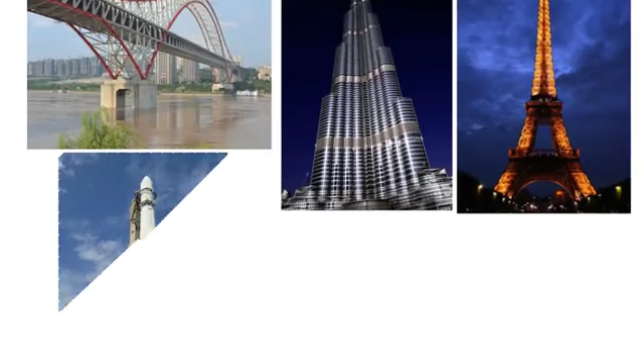First, structural engineering is about calculating and understanding the forces, strength, stability, and so on within a structure. It could be a bridge, a skyscraper, a landmark, or even a spacecraft or aircraft. Remember, these structures are very heavy and need to support their own weight so that they don't collapse. Now this subfield is the most math intensive and has lots of physics.

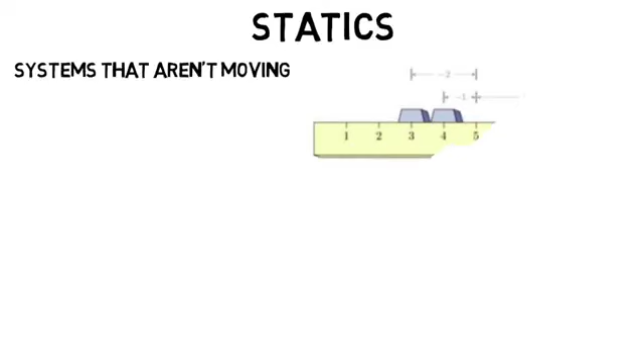All civil engineers will take a class called statics, which is all about the forces and systems that are not moving. In basic physics, you may have done a statics problem, like where does this support have to be for the system to be totally balanced and therefore not moving. You summed all the forces which equaled 0 and all the torques which equaled 0. And that's the basics of statics.

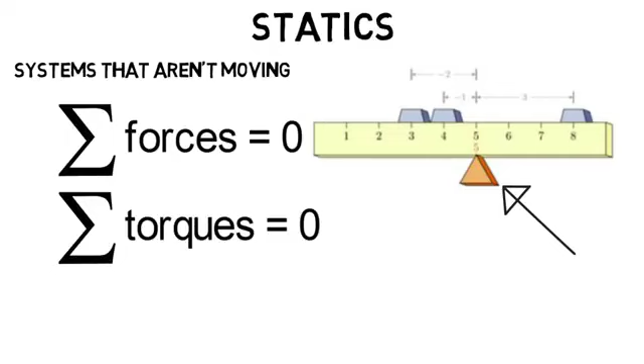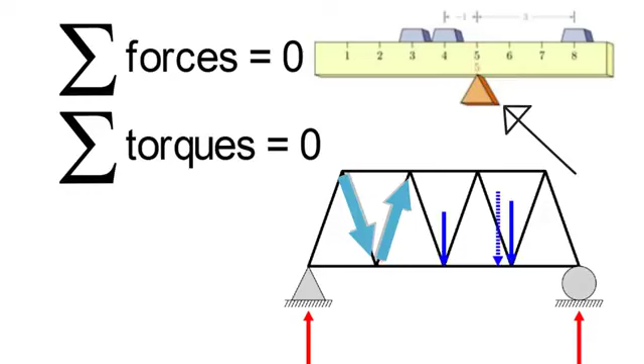So if you're looking at the forces within a bridge or truss, well, the same principles apply, but now there's just more to it. The weight is straight down as shown in blue, all the beams exert forces on one another, but the sum of them is equal to 0, and the torques sum to 0 as well because the bridge is not moving. And it's of course even more complicated than this, but if you enjoy that kind of basic physics you see above, then you'll likely enjoy the statics and physics you see in structural engineering.

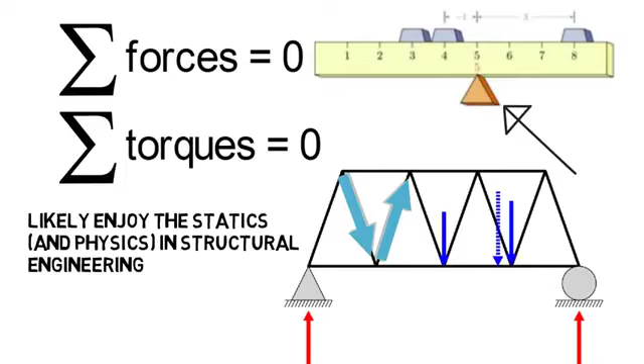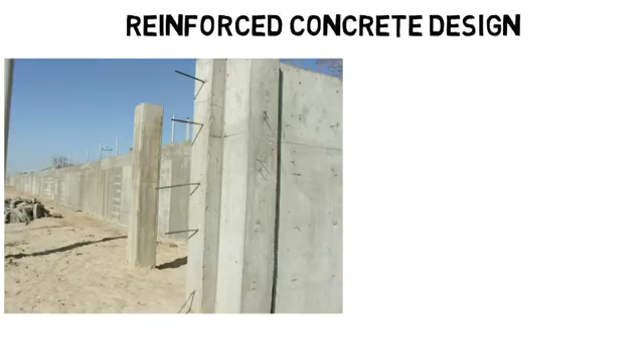So that's just a very simplified explanation, but now let's dive into some of the classes they would take. One class that would be important for structural students is a reinforced concrete class. In concrete structures, they reinforce it by putting steel beams in the concrete. We can't see those beams, but here, before construction is done, you can see them sticking out, or you can see a lot of them on these unfinished columns. So why do they do this? Why isn't concrete good enough?

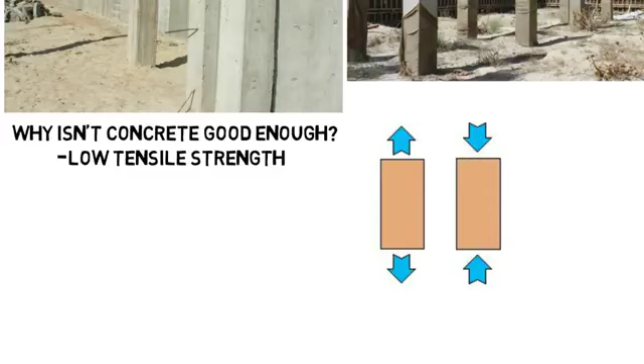Well, concrete alone, once hardened, has low tensile strength, as in it does not handle being pulled very well. However, it's okay with being compressed. But to counteract that low tensile strength, they add steel beams and pour wet concrete, which hardens around them, and then those steel beams have high tensile strength to counteract those types of forces on the structure.

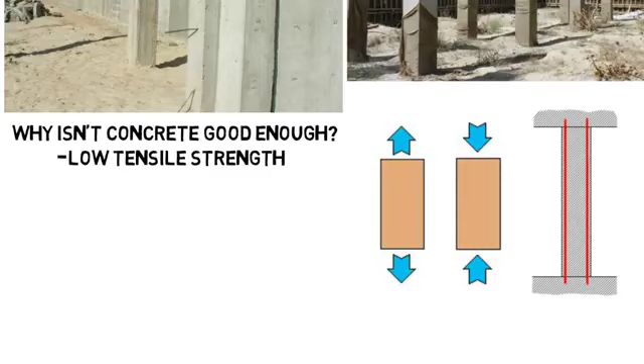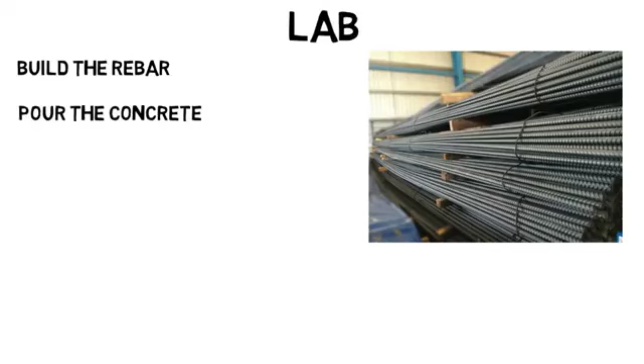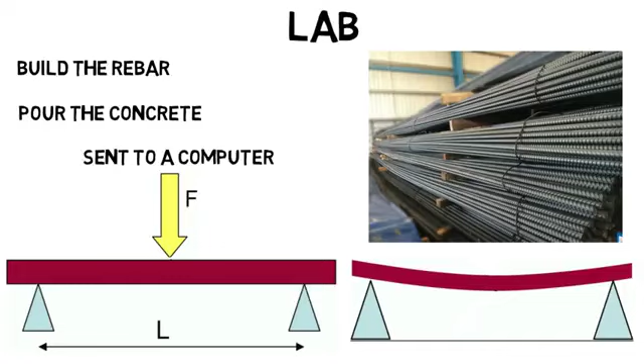So in a lab for this class, you might build the rebar, or the steel reinforcing rods, pour the wet concrete onto them, then once it dries, use a machine that holds the beam on both sides, then apply forces in the middle and keep increasing the force until the beam breaks or cracks and starts falling apart. That force being applied is sent to a computer that tells us the loading on the beam so we can collect the data and get the properties that we need.

You can take structural dynamics as an elective class. Dynamics is about moving systems, unlike statics. So this is one of the few classes where motion is included. So whether it's wind or an earthquake that shakes a building, you need to know how that motion will impact the structure itself and all the forces within it.

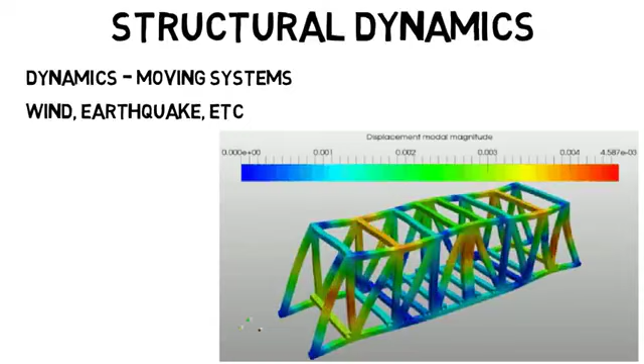I've shown this animation before, but mostly for mechanical engineers as it's a vibrating system that they could analyze, but civil engineers could get into this as well. They have to make sure their designs can stand up against any type of movement the structure may be subject to. You could take an elective class on seismic analysis, which is specifically about calculating the responses of a structure to an earthquake, or one on bridge engineering, which would be a class on highway bridges, materials used, distribution of loads, and how forces are spread throughout the structure, and so on.

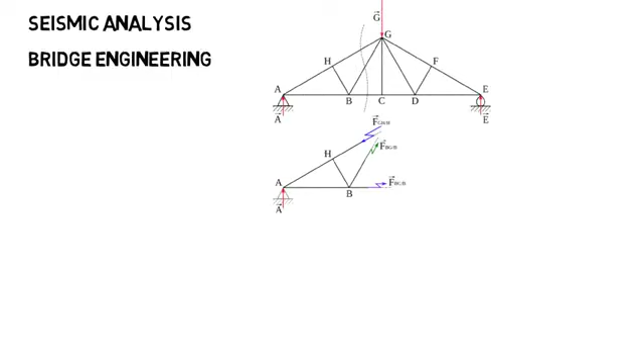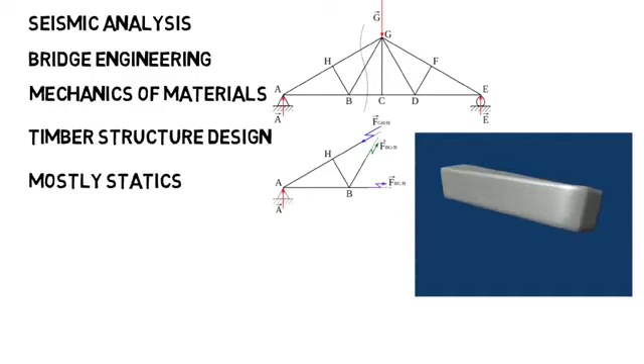You may still have to do hand calculations, but most of the rigorous analysis you learned in school will be left to the software.

Now let's move on to geotechnical engineering, and you'll already see how different these disciplines are. Geotechnical engineers are concerned with the behavior of earth materials like rock and soil, but the main focus is soil. This may seem odd, but you'll see how important this is. The structural engineer can do everything right to make sure the building will stand up, but if the geotechnical engineer messes up and you put a structure on soil that can't withstand it or is uneven, the building could fall, sink into the ground, or even lean to one side, probably the most famous being the Leaning Tower of Pisa, which was a result of soil issues.

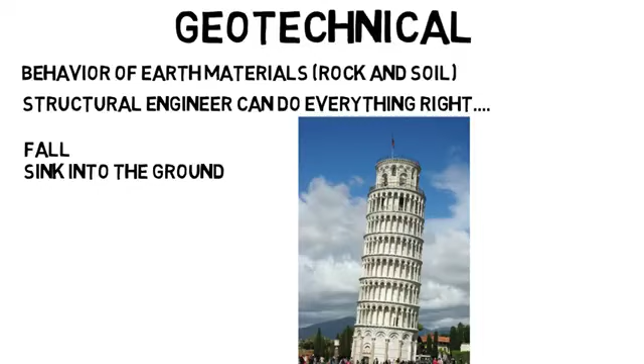Then they also have to consider the foundation of the structures being designed, like should they have a shallow foundation or a deep foundation. You may not realize it, but our houses and all the buildings you see have foundations that go underneath the earth to keep the structure as stable as possible by transferring the weight from the structure to the earth.

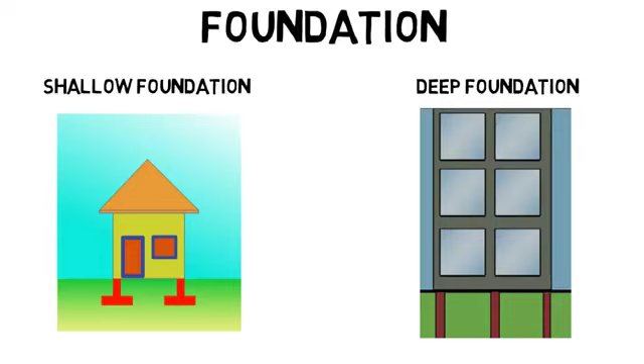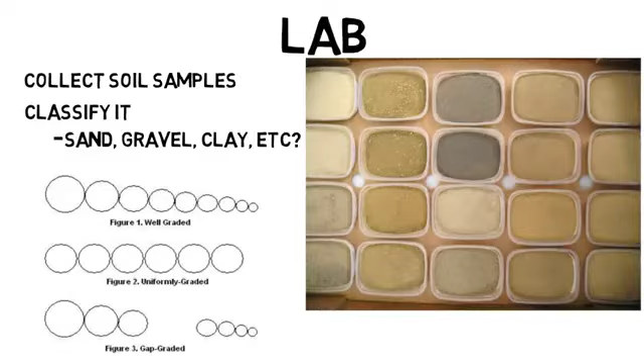But geotechnical engineers rely heavily on testing. So a lab you might see in college is to go out as a class and collect soil samples around your university and bring them to lab. You would have to classify it, like is it sand, gravel, clay, etc. There are many soil types, and you may have to look at the grain size or how it reacts to water. You determine its water content by analyzing the sample, which will be comprised of solid soil, water, and air of different masses and volumes.

But most importantly, you'll measure how the soil will react to mechanical loading or to different forces acting on it. So you might perform a triaxial test, for example. Too complicated to explain for this video, but essentially you put the soil in an enclosed area and apply a force or load to the top which pushes down on the soil. Then pressure sensors measure the pressure at different points to see how the soil is being affected.

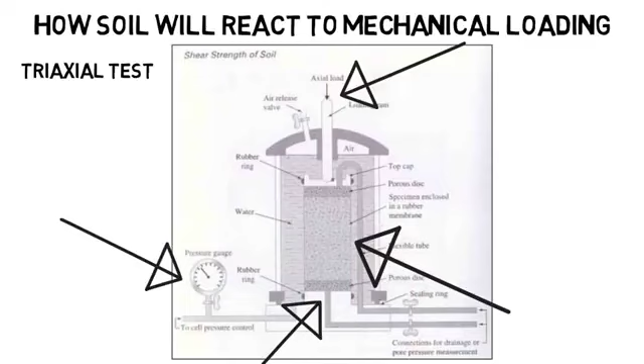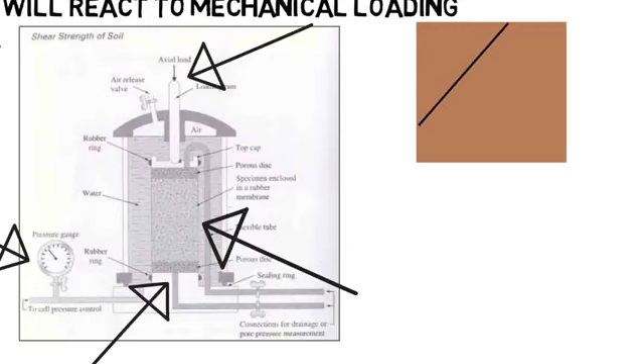If you imagine a square sample of soil and you add a force to the top, the soil can fail along some weak plane. Basically, the weight overpowers the friction holding the soil particles together, and the soil will start to slide, which is known as shear failure. Its ability to stand up to this is known as shear strength, which is one thing that the triaxial test on the left tests for.

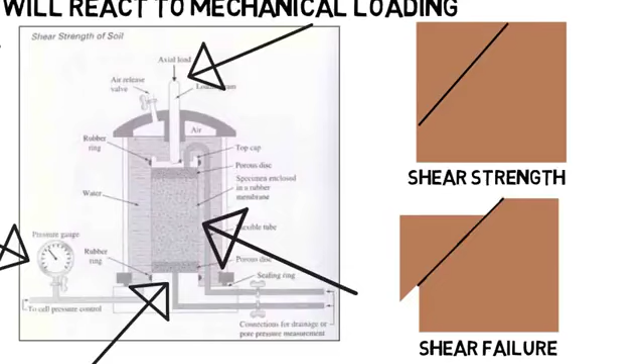And this leads us to what a career in geotechnical engineering could be like. You might be the person who goes out to the field where a structure is going to be built and collects soil samples all around the area for testing. Or you could do testing at the field.

One of the most used tests right now in this field is cone penetration testing, where a large truck goes out to the field which has all this equipment on it, and a cone is pushed into the soil, and the pressure will be monitored by a computer on the truck as it moves through the soil into the earth. Based on the pressure, you can analyze the soil mechanical properties.

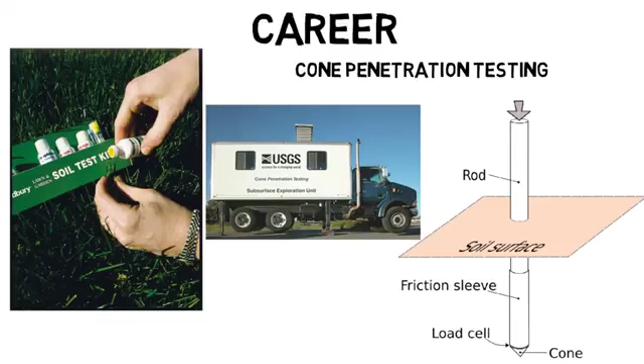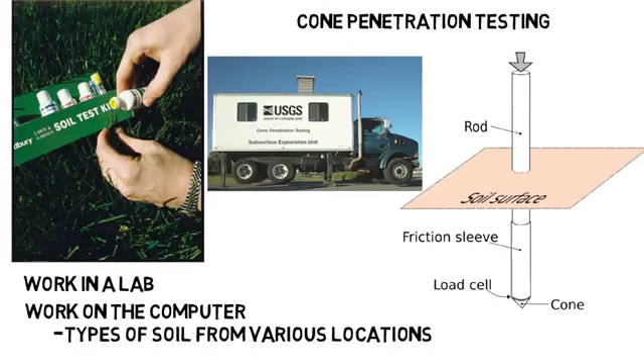Or maybe you could work in a lab where you would do the testing on the soil after it's been collected, like I showed with the triaxial test. Or maybe you could work on the computer and input the different types of soil from the various locations at the site so you can digitally lay out the area that the structure will rest on. So you could be in the field, in the lab, or on the computer.

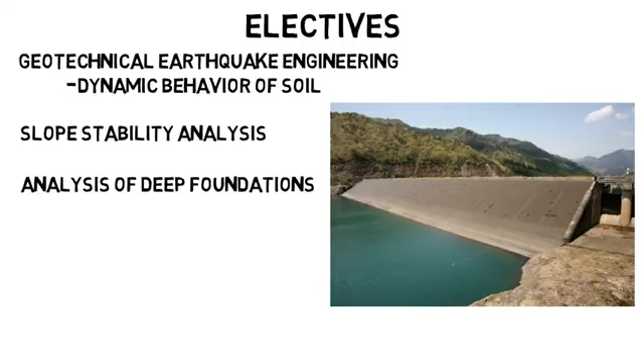Your elective classes could include geotechnical earthquake engineering, which would be like learning the dynamic behavior of soil as opposed to the structure itself. Then slope stability analysis and how to safely design structures on slopes. An example would be an embankment dam. Analysis of deep foundations, where the structure goes deep into the earth for a stronger support, like for skyscrapers. And of course, there are many more classes.

Now let's move on to water resources engineering. This is about the design of systems to manage human water resources. They can work on a water treatment facility, designing dams, pipelines, channels, canals, and so on. Maybe you have to design a storm drain system in the event of a large storm. Where is all the water going to go, and how will you get it to the ocean efficiently?

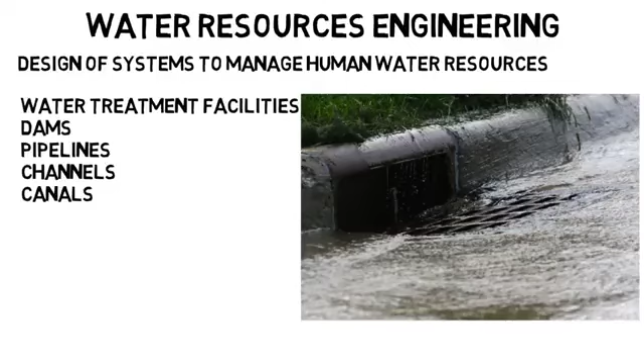Or you could design a canal, which is an artificial waterway to transport water for irrigation, or can be used for ships and boats. Or you could design a culvert that will allow water to flow under a road or trail or some other obstruction.

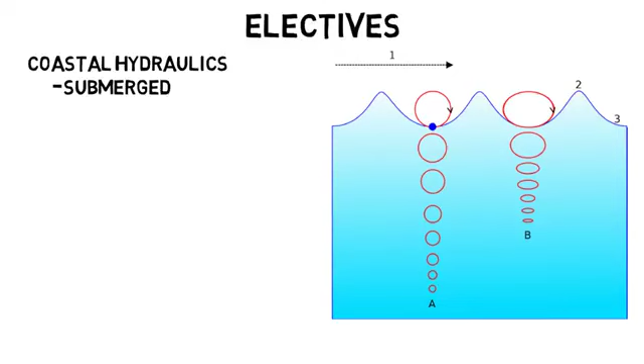Elective classes you could take include coastal hydraulics, where you learn about ocean wave propagation, submerged pipelines, seawalls to protect human habitation, and so on. Or open channel hydraulics, which is about fluid flow in an open channel as opposed to a closed channel or pipeline.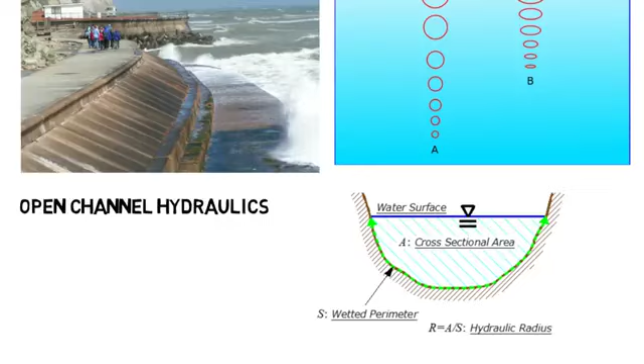And last is transportation engineering. This is about safe and efficient movement of goods and people. These are the engineers who design streets, roads, highways, railroads, public transportation systems, and even airports.

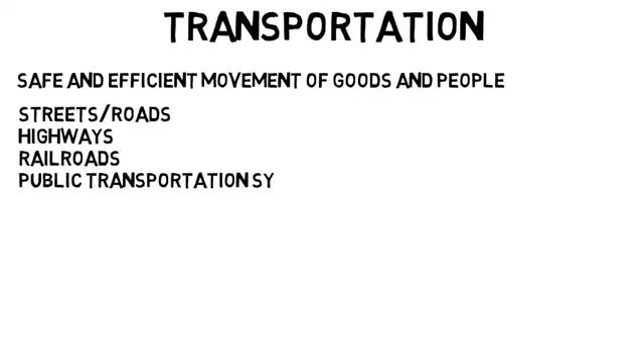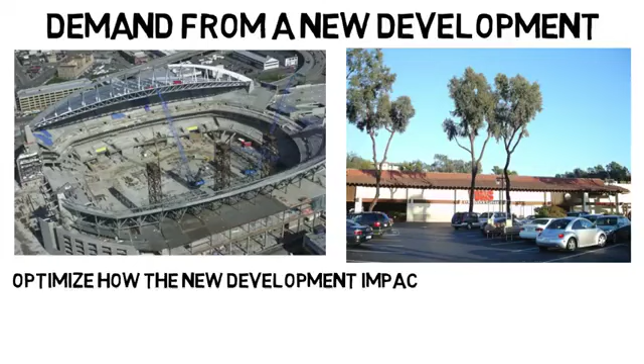This engineer has to look at the kind of demand from a new development, whether it's a new stadium in your city or a new grocery store in a new location. This causes new types of traffic throughout the area. The engineers try to optimize how the new development impacts existing traffic. They look at data from other similar places to see what kind of traffic they get, then try to make improvements where possible.

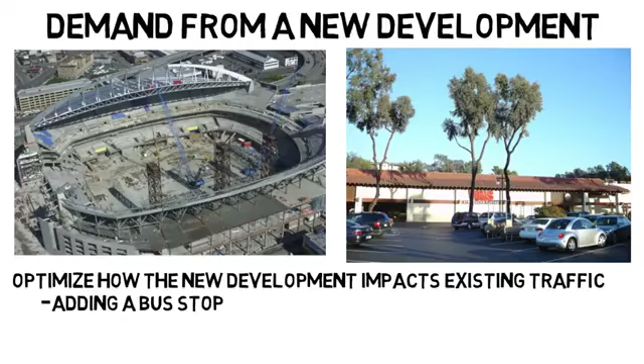It could be simple, like adding a bus stop in the nearby area, all the way to expanding the roadway to allow for more traffic.

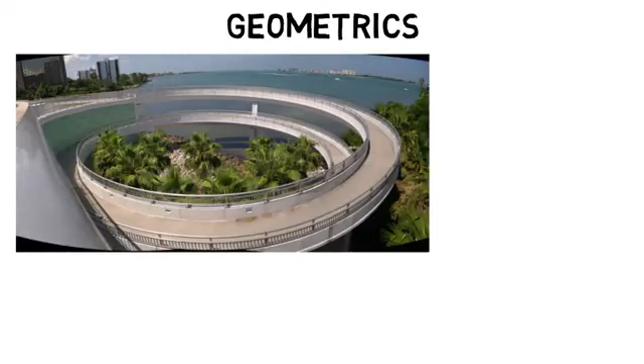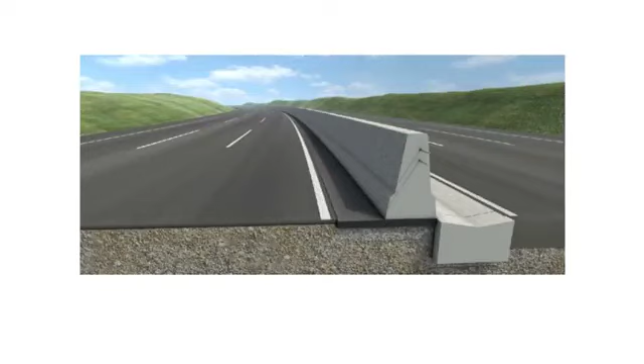They could work on the geometrics of the roadway, such as what radius of curvature an off-ramp needs for a car going 55 miles per hour so the tires won't slip. Or if going up an incline, the driver needs to see far enough ahead to stop for a sudden obstacle. Or what the cross sections of a freeway need to be for the lanes and shoulders to accommodate the expected traffic.

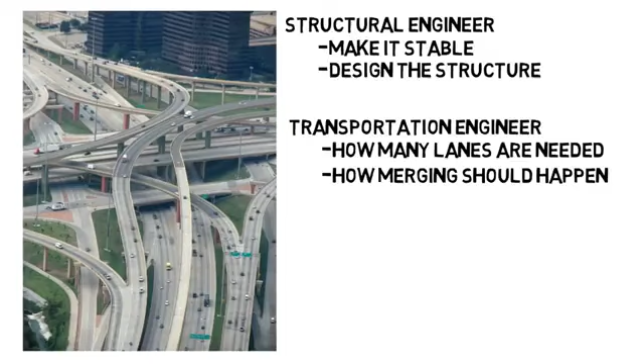Let's say a highway interchange is being designed. A structural engineer would make it stable and design the structure itself, but the transportation engineer would determine how many lanes are needed based on traffic, or how the merging should happen to maximize safety. They make sure the layout is designed to maximize traffic flow and safety rather than the physics of the structure itself.

Often these engineers evaluate potential improvements to cities in terms of transportation rather than create a totally new design. You probably haven't had many new highways put into your city in the last few years, but there's probably been plenty of construction, whether it be adding an express lane or a bike lane. So they might not create a new bus transportation system, but they may optimize the existing one.

Maybe they take data from how many people get on the bus, how long the bus takes to complete its route, how long people are waiting for the bus, and so on, to optimize the route, the amount of stops, and more.

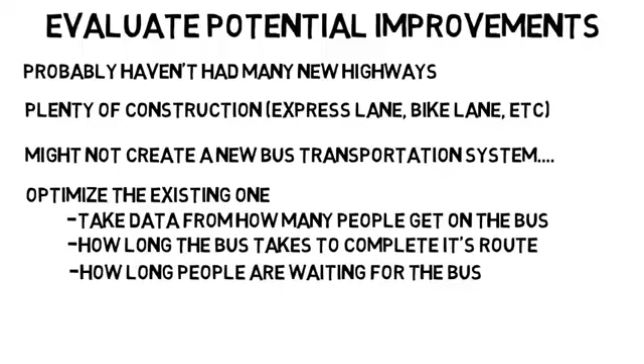Your career will also likely involve a good amount of computer work. You might have to create a layout of the new lane, off-ramp, bridge, or whatever you're designing on AutoCAD, which is a very important software for civil engineers.

Or you could use software to analyze and simulate traffic. You could actually lay out the roadway of a city and use collected data of traffic during different times of the day and simulate new additions. Like you could add a stoplight somewhere and see what the new traffic would be like. Or you can make a minor change, like making a certain stoplight stay green for a few seconds longer, and see how it affects traffic on those streets.

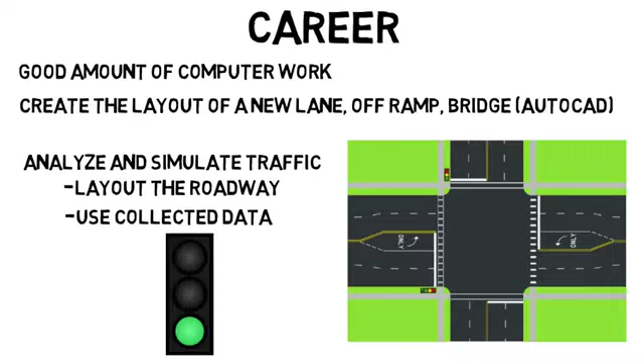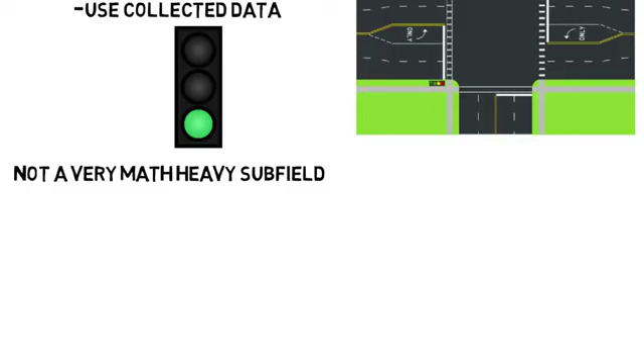Just note, this is not a very math-heavy field. In fact, it's probably the least math-intensive of the four subdisciplines I've talked about. It's more about taking data and analyzing it. Even when I talked about the radius of curvature and how fast someone should be going, you won't use the coefficient of friction and do circular motion physics or anything like that. You use even simpler equations to get what you need.

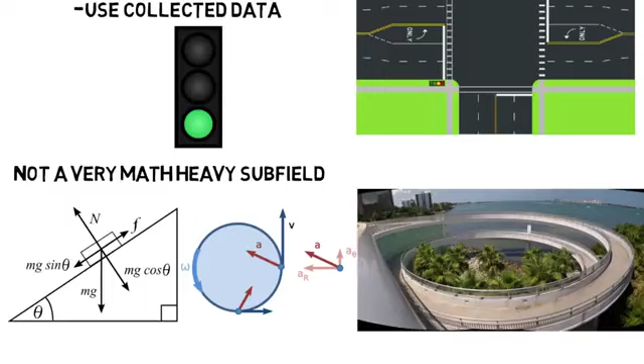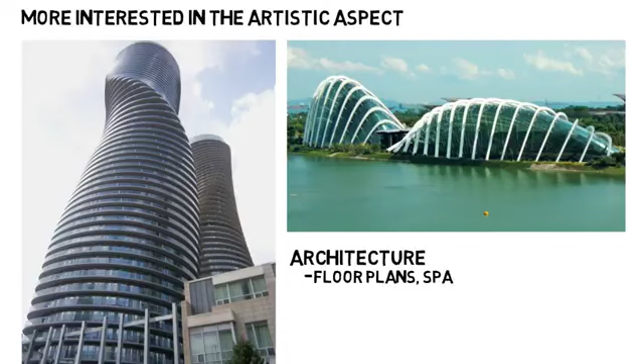Now that's all the main subdisciplines of this major, but there are some final thoughts I want to include. If you're more interested in the artistic aspect of building and structure designs, then architecture will be better for you. Architects deal more with the floor plans, spatial concerns, and the shape and design of the buildings. They have to understand structures and physics, but not quite as much as a structural engineer. They would hand off their design to the structural engineer, who would make sure the entire structure could support itself, dealing with more of the technical work.

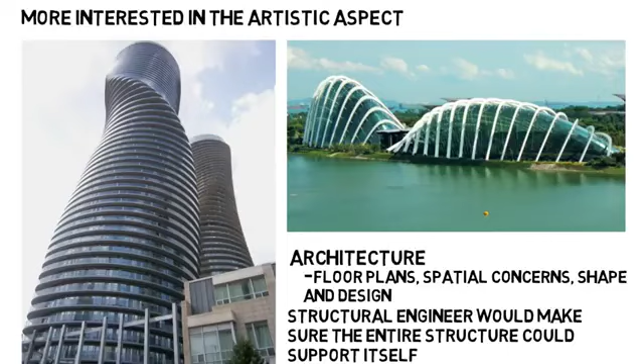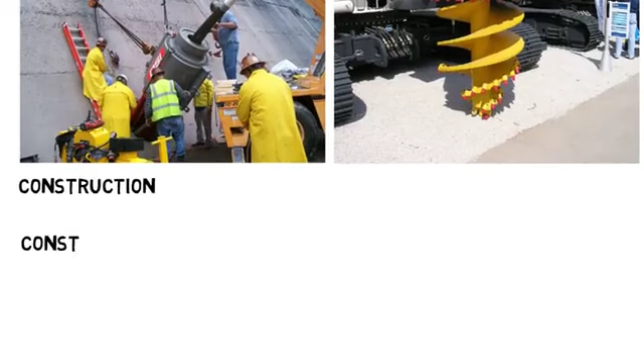Then, if you want to be the one who puts on the hard hat and does all the hands-on work with the machines and physically builds the structures, construction will be better for you. But there's also construction management, which you can still get a job in as a civil engineer. Construction companies will hire civil engineers because of their technical background. Construction is the hands-on part, but construction management is more about guiding the construction, putting together schedules, budgeting, and figuring out how all the pieces will come together.